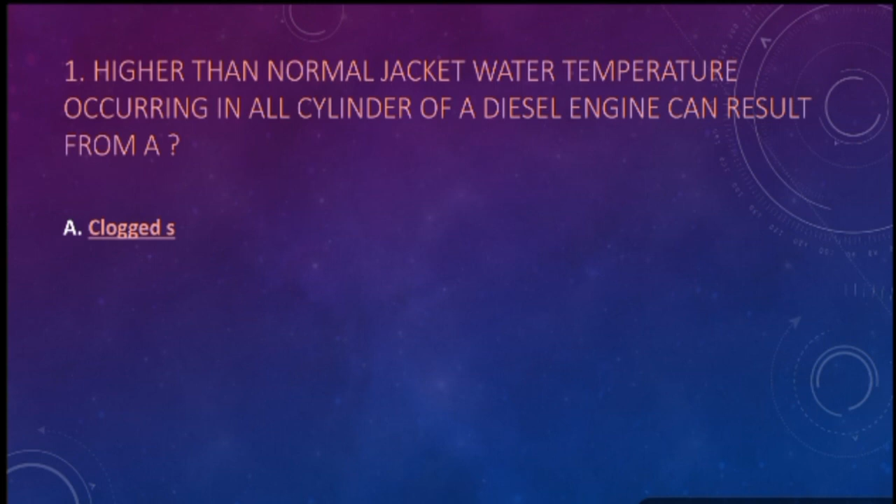Higher than normal jacket water temperature occurring in all cylinders of a diesel engine can result from: A. Clogged sea suction strainer. B. Oil suction line restriction. C. Correct amount of coolant. D. Cavitation erosion in the water jackets. Answer is clogged sea suction strainer.

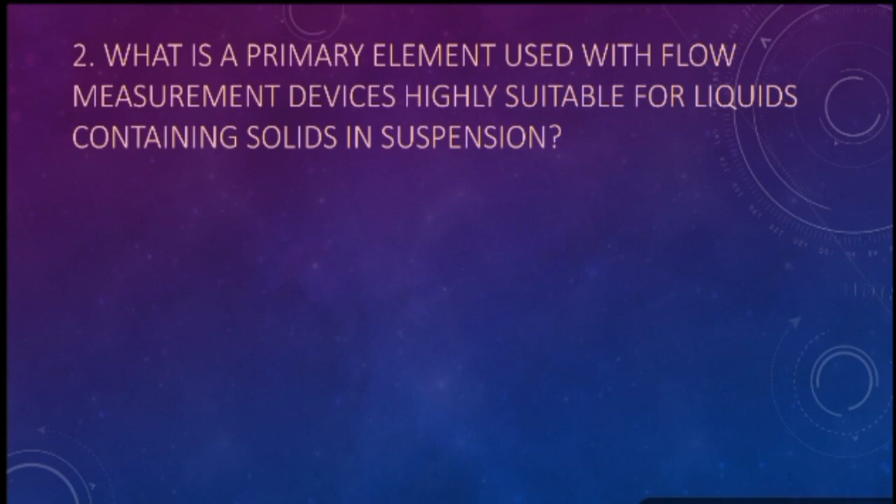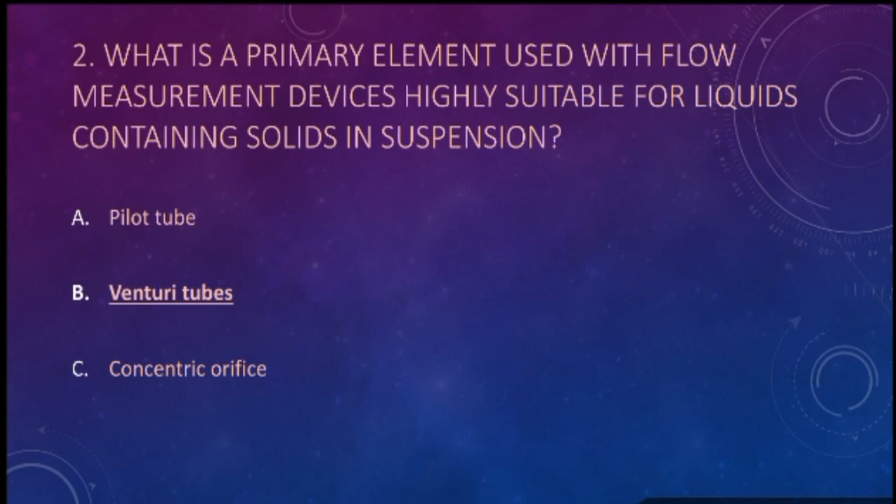What is a primary element used with flow measurement devices highly suitable for liquids containing solids in suspension? A. Pitot tube. B. Venturi tubes. C. Concentric orifice. D. Convergent nozzle. Answer is Venturi tubes.

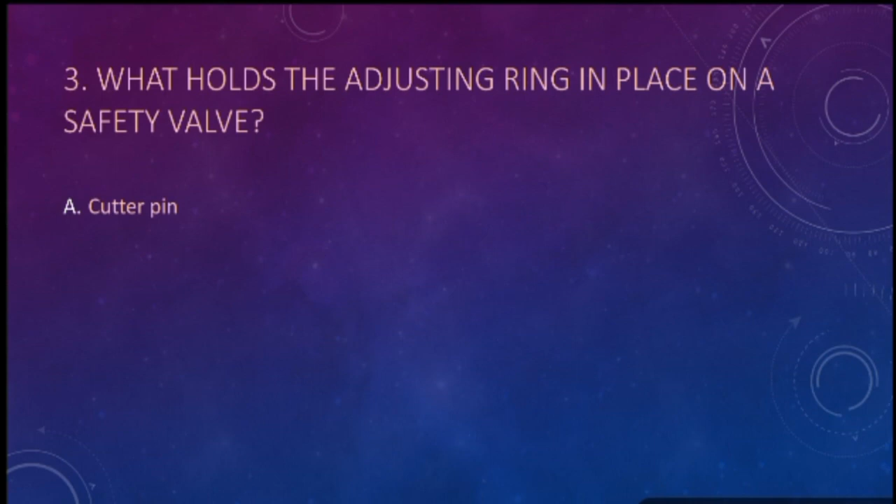What holds the adjusting ring in place on a safety valve? A. Cotter pin. B. Locking nut. C. Set screw. D. Wire seal. Answer is set screw.

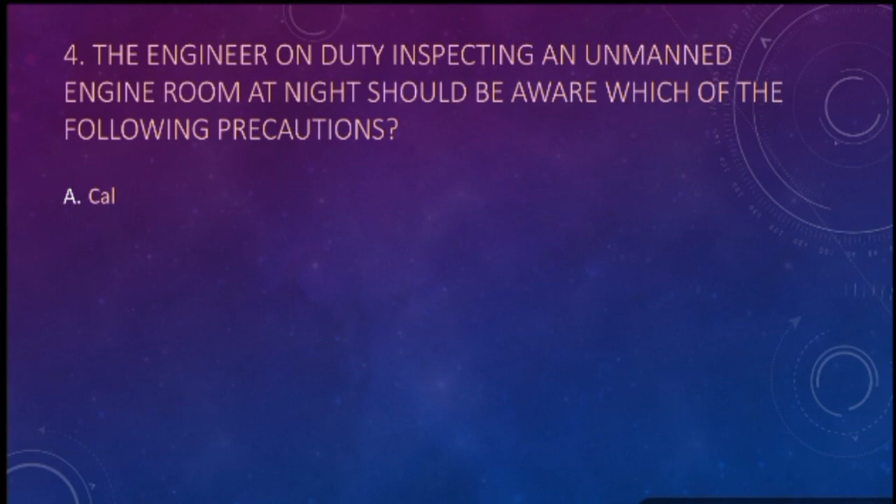The engineer on duty inspecting an unmanned engine room at night should be aware of which of the following precautions? A. Call the oiler on duty. B. Switch on the dead man alarm upon entering the control room. C. Silence the alarm so the other engineer cannot hear. D. Switch the engineer's call alarm to notify other engineers. Answer is switch on the dead man alarm upon entering the control room.

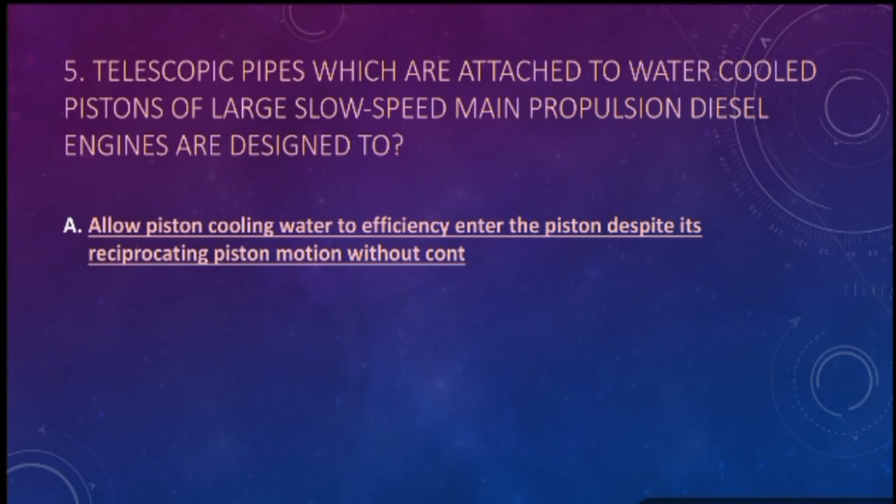Telescopic pipes, which are attached to water-cooled pistons of large slow-speed main propulsion diesel engines, are designed to: A. Allow piston cooling water to efficiently enter the piston despite its reciprocating motion without contaminating the engine lube oil. B. Prevent contamination of the cylinder cooling water with engine lube oil. C. Overcome excessive crankcase pressure. D. Prevent excessive lube oil temperature.

Answer is allow piston cooling water to efficiently enter the piston despite its reciprocating motion without contaminating the engine lube oil.

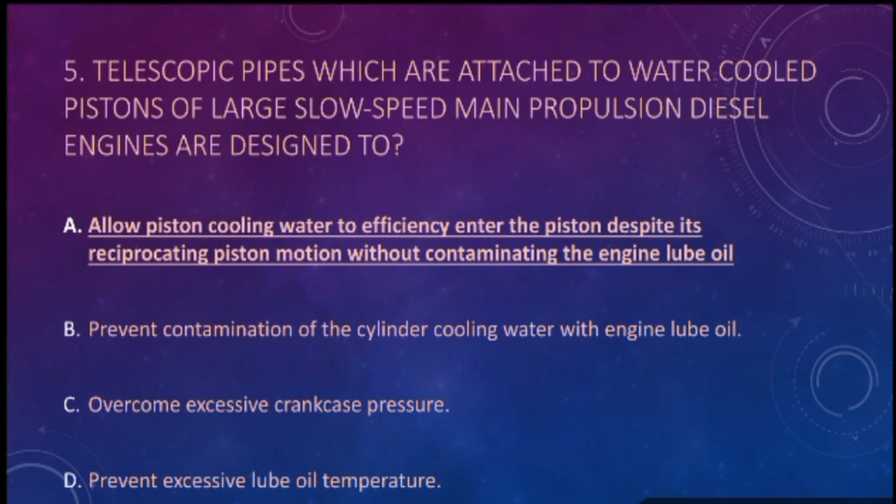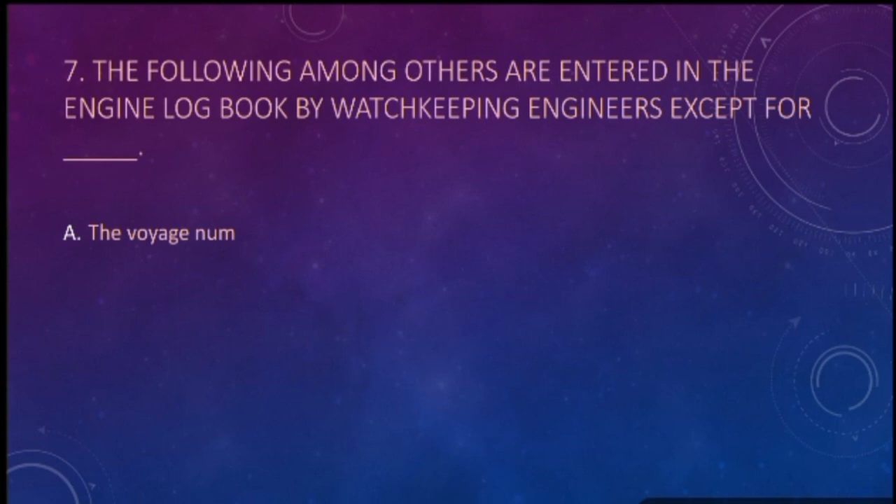The following, among others, are entered in the engine logbook by watch-keeping engineers except for: A. The voyage number and from and to ports. B. The running hours of different machineries each watch. C. The remaining on board, ROB, quantity of fuel oil and diesel oil at noon. D. The parameters of running refrigeration and air conditioning machineries. Answer is the remaining on board, ROB, quantity of fuel oil and diesel oil at noon.

Why should a boiler furnace be purged before the burner is lit off? A. To clear the furnace of any explosive gases. B. To control air pressure in the windbox. C. To make the fire easier to light. D. To clear the windbox of any explosive gases. Answer is to clear the furnace of any explosive gases.

What is the primary or most important duty of a watch-keeping engineer while taking over the watch? A. Know the safety of all crew, including oneself. B. Know the chief engineer or second engineer's standing orders. C. Know the pending jobs to be done or continued. D. Know which equipment are not running well and inform the outgoing watch. Answer is know the safety of all crew, including oneself.

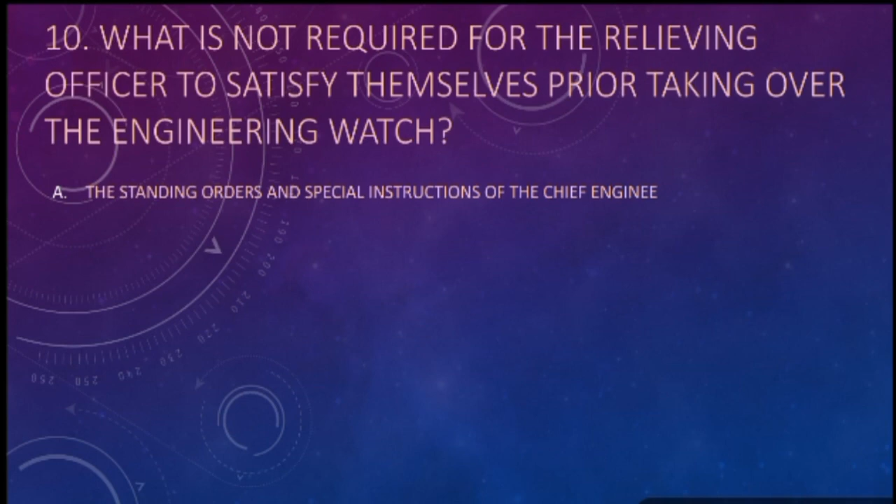What is not required for the relieving officer to satisfy themselves of prior to taking over the engineering watch? A. The standing orders and special instructions of the chief engineer officer relating to the operation of the ship's systems and machinery. B. The nature of all works being performed on machinery and systems, the personnel involved, and potential hazards.

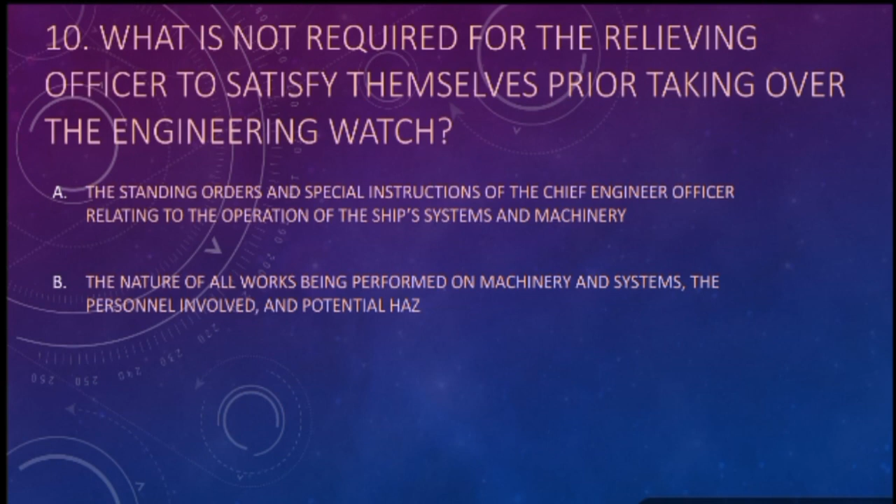C. Understanding of any verbal orders coming from the master or chief officer with regards to cargo operation. D. The nature of all works being performed on deck, the personnel involved, and potential hazards. Answer is the nature of all works being performed on deck, the personnel involved, and potential hazards.

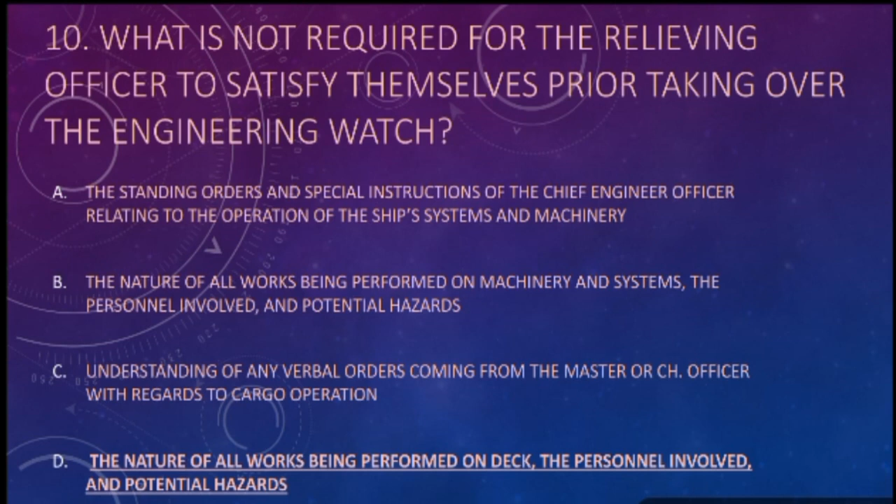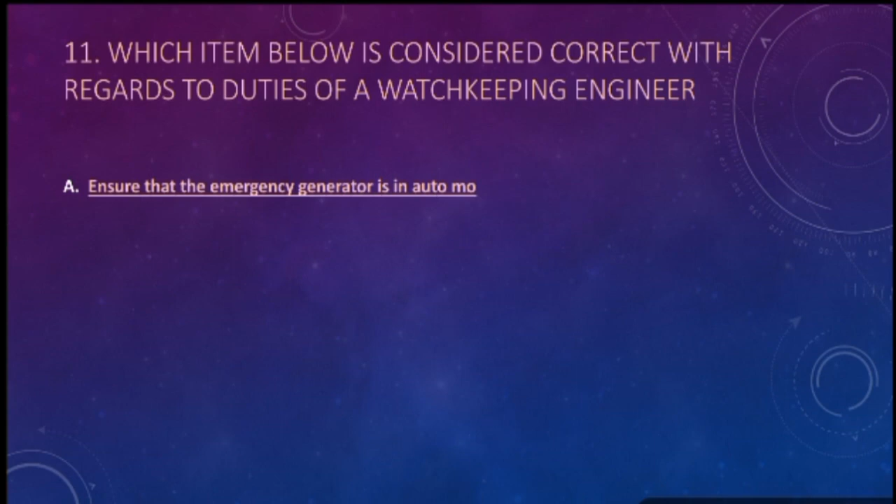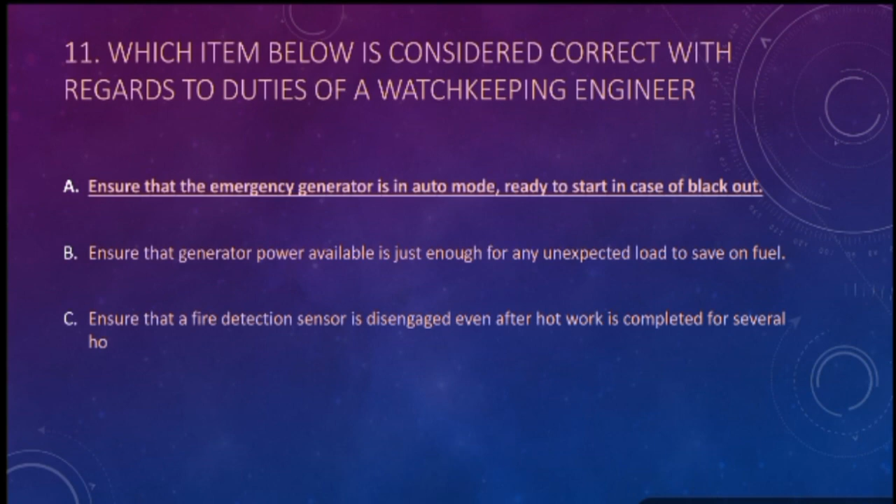Which item below is considered correct with regards to duties of a watchkeeping engineer? A. Ensure that the emergency generator is in auto mode, ready to start in case of blackout. B. Ensure that generator power available is just enough for any unexpected load to save on fuel. C. Ensure that a fire detection sensor is disengaged even after hot work is completed for several hours to avoid an alarm. D. Ensure that main engine RPM fluctuates around the set point to ensure that the governor is functioning properly. Answer is ensure that the emergency generator is in auto mode, ready to start in case of blackout.

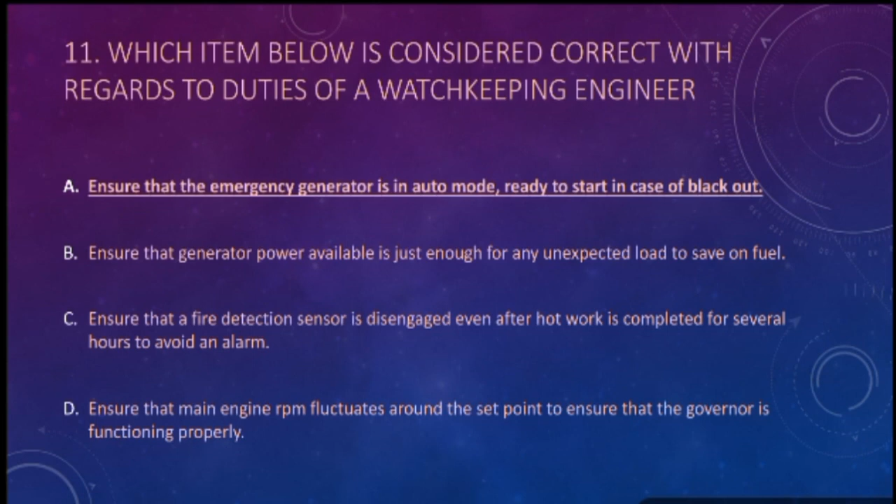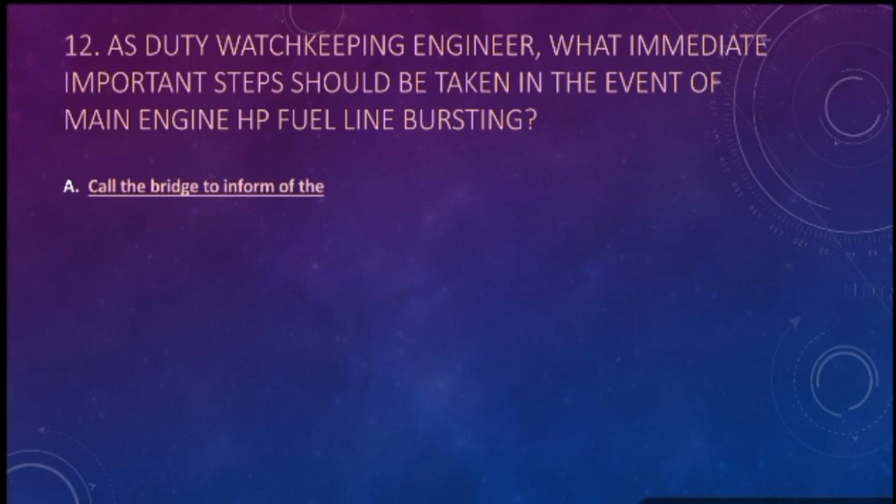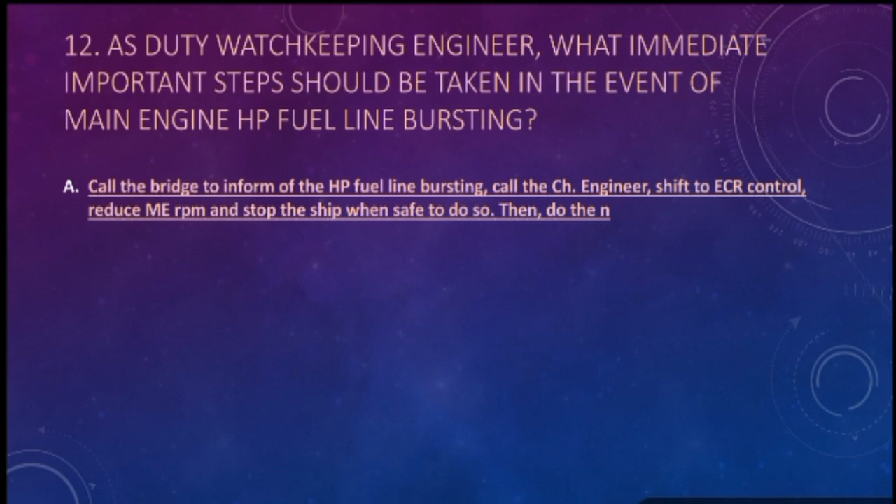As duty watchkeeping engineer, what immediate important steps should be taken in the event of main engine HP fuel line bursting? A. Call the bridge to inform of the HP fuel line bursting. Call the chief engineer, shift to ECR control, reduce ME RPM and stop the ship when safe to do so. Then, do the necessary repairs. B. Stop the ME using the emergency stop button and inform the bridge and chief engineer. Then, do the necessary repair.

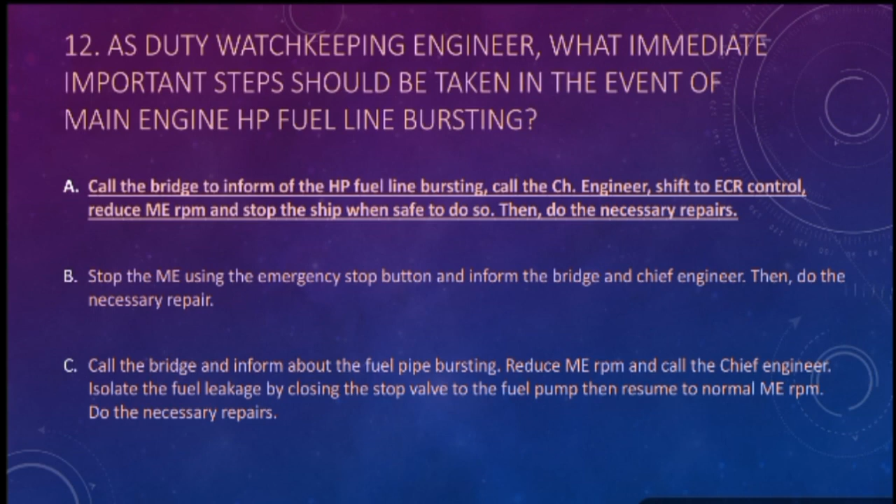C. Call the bridge and inform about the fuel pipe bursting. Reduce ME RPM and call the chief engineer. Isolate the fuel leakage by closing the stop valve to the fuel pump, then resume to normal ME RPM. Do the necessary repairs. D. Place a deflector around the fuel leakage to direct the spray downwards to the tank top. Effect the repairs later when convenient.

Answer is call the bridge to inform of the HP fuel line bursting. Call the chief engineer, shift to ECR control, reduce ME RPM and stop the ship when safe to do so. Then, do the necessary repairs.

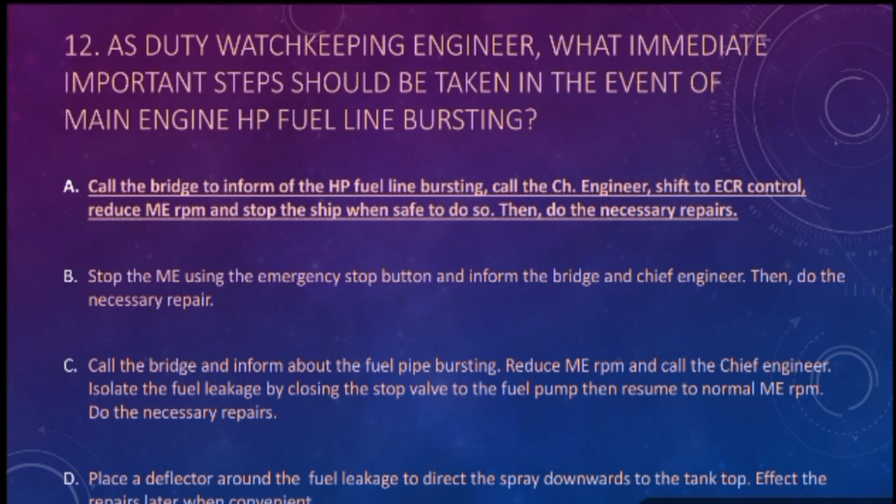What action is being undertaken when an engineer takes into account the safety, urgency, and adequacy in operating and handling of machinery, especially when carrying out the task in various situations? A. Situational awareness. B. Prioritization. C. Consideration. D. Assertiveness. Answer is prioritization.

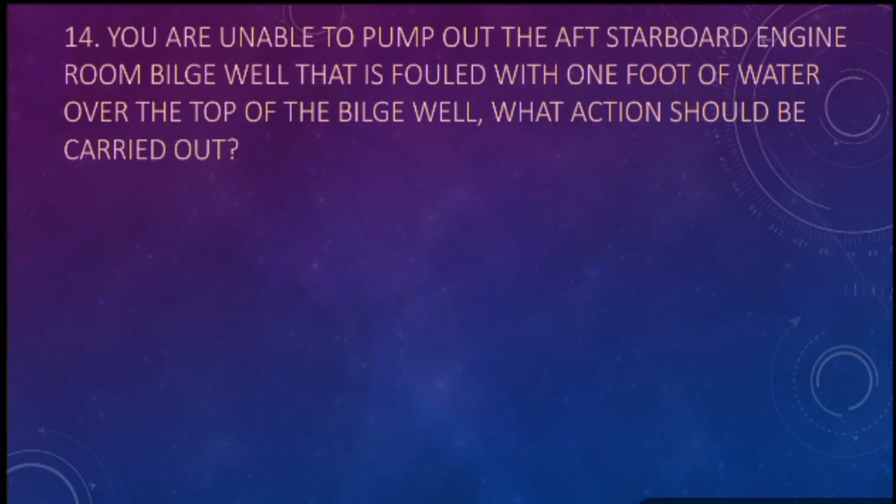You are unable to pump out the aft starboard engine room bilge well that is fouled with 1 foot of water over the top of the bilge well. What action should be carried out? A. Remove the bilge manifold valve and attempt to back flush the line. B. Simultaneously operate all available bilge pumps. C. It is only necessary to transfer half the contents of a drum of degreaser into the bilge well. D. Send the wiper into the well with only a scoop and pail. Answer is remove the bilge manifold valve and attempt to back flush the line.

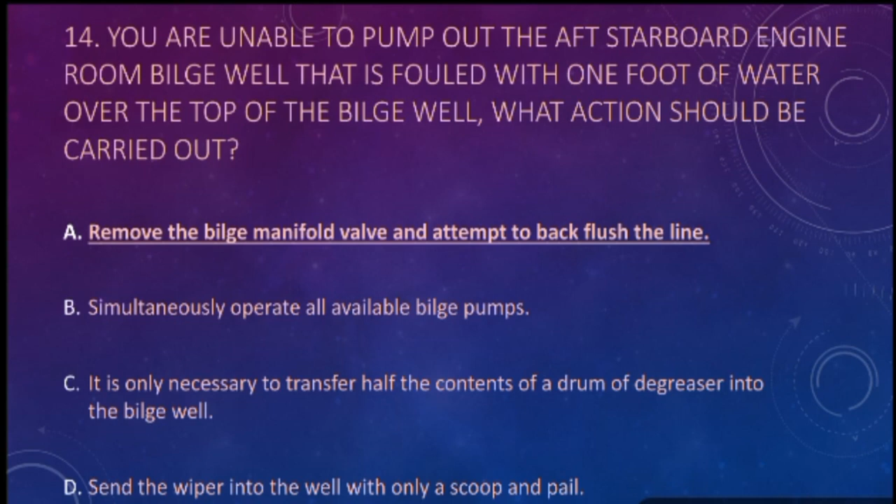As a duty engineer, you should know that some auxiliaries are not designed to handle steam at boiler pressure. Which of the following devices is usually fitted in the branch line to deliver steam at the correct pressure? A. A constant quantity regulating valve. B. A steam pressure reducing valve. C. An orifice. D. A nozzle valve. Answer is a steam pressure reducing valve.

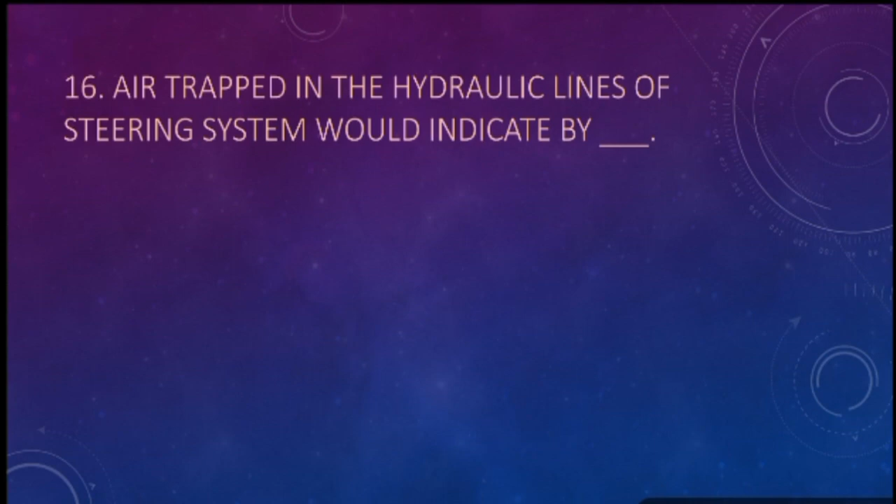Air trapped in the hydraulic lines of the steering system would be indicated by: A. Ram relief valves lifting. B. Erratic rudder response. C. Bubbles in the sight glass. D. The pump overspeeding. Answer is erratic rudder response.

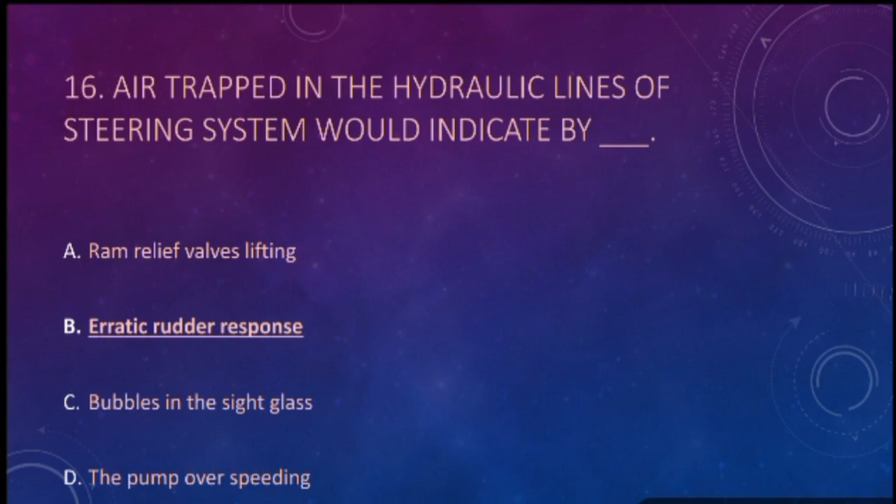Medium-temperature hot water systems have been used in place of small auxiliary boilers, producing 100 psig steam with: A. 340 Fahrenheit water system, B. 320 Fahrenheit water system, C. 280 Fahrenheit water system, D. 300 Fahrenheit water system. Answer is 320 Fahrenheit water system.

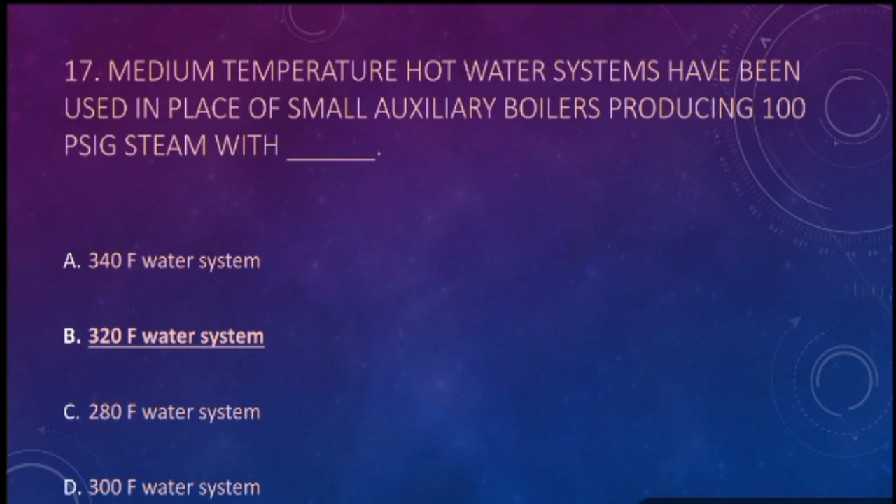In an automated engine, the center from which the ship's engine room is controlled is called: A. Control Plant Station, CPS, B. Engineering Control Room, ECR, C. Main Engine Nerve and Control Station, MENS, D. Bridge. Answer is Engineering Control Room, ECR.

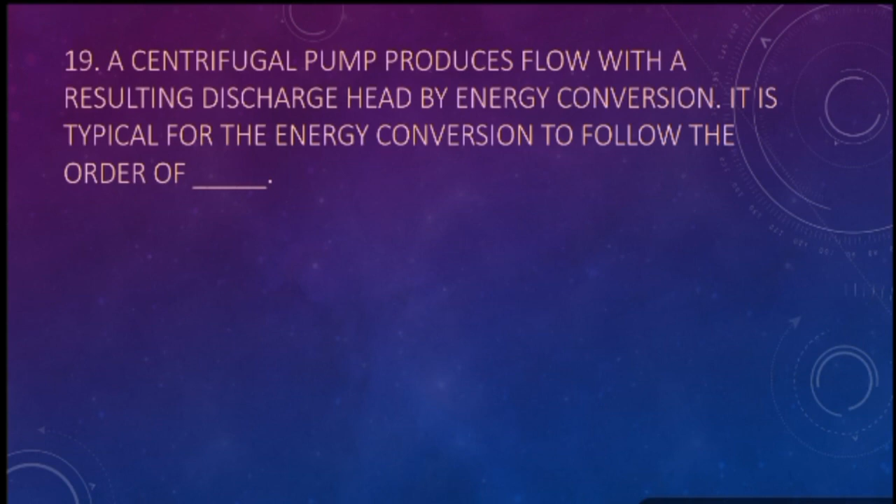A centrifugal pump produces flow with a resulting discharge head by energy conversion. It is typical for the energy conversion to follow the order of: A. Kinetic energy to potential energy to kinetic energy, B. Mechanical energy to potential energy to kinetic energy, C. Potential energy to mechanical energy to kinetic energy, D. Mechanical energy to kinetic energy to potential energy. Answer is mechanical energy to kinetic energy to potential energy.